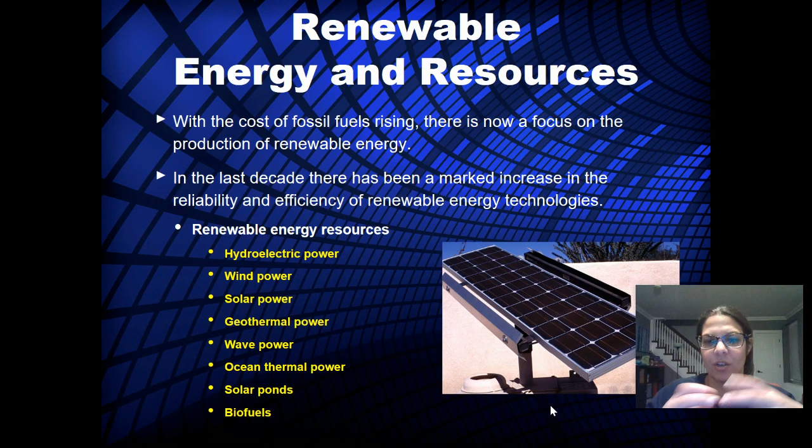Oh, and biofuels, how could I forget about them. Biofuels are anything that you burn, like wood is a biofuel. It's a renewable resource, depending on how you use it—think back to the Lorax. Also, cow poop can be used. Remnants of, it's called bagasse, the remnants of cane sugar. You take the sugar out of the sugar cane, and then you're left with this stuff, and you can burn it for energy.

So, advantages: there's little local or global environmental long-term effect, but like solar panels, we don't make them in the US because they're not very environmentally friendly to make. Once established, you have very little input needed to keep these systems running, which sometimes is why we don't want them, because they're only going to provide jobs to install them. And then the maintenance is very few and far between.

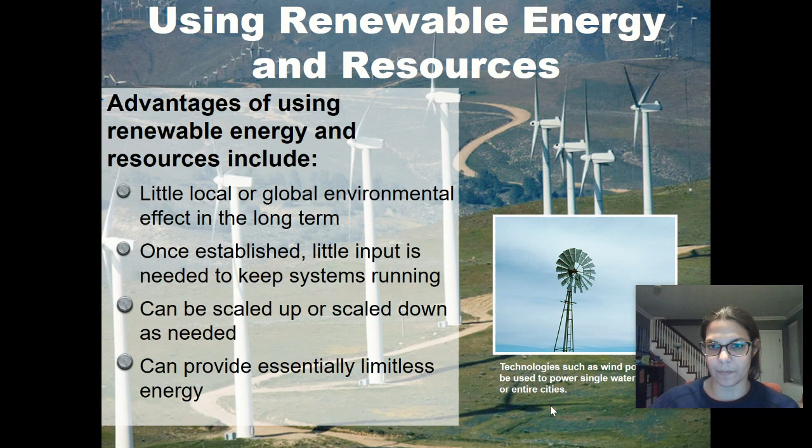They can be scaled up or scaled down as needed, and they can provide limitless energy. The sun isn't going to stop shining, the wind isn't going to stop blowing, the tides are going to keep going.

Disadvantages: there are high setup costs, just like with almost any type of energy. There's a lot of environmental damage in the short term, but usually it does bounce back. Like with solar panels, you have a field, and what happens is you change the habitat of the area. A lot of technologies are inefficient.

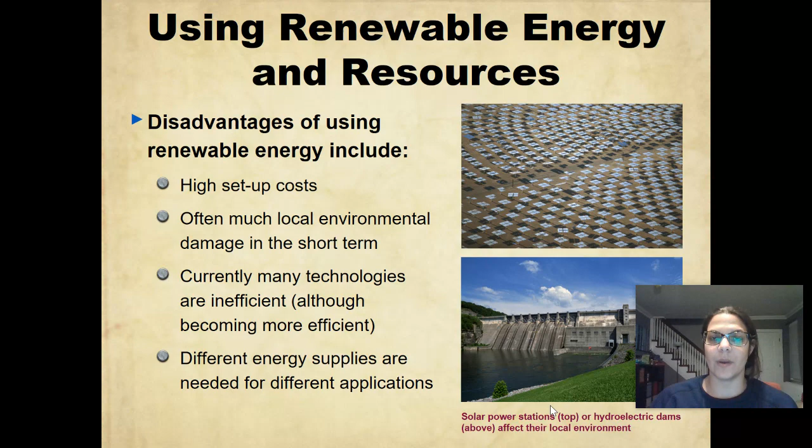They're becoming way more efficient—solar panels used to be only like 2% efficient, and now they're 24% efficient last time I checked, which is really amazing news. And different energy supplies are needed for different applications. You can't put solar energy in your car, but if you have an electric car, you can plug it into an outlet, and hopefully your solar panels will end up powering your electric car.

So we have wind power, wave and tidal power, solar panels, and hydroelectric power, which we've already gone over.

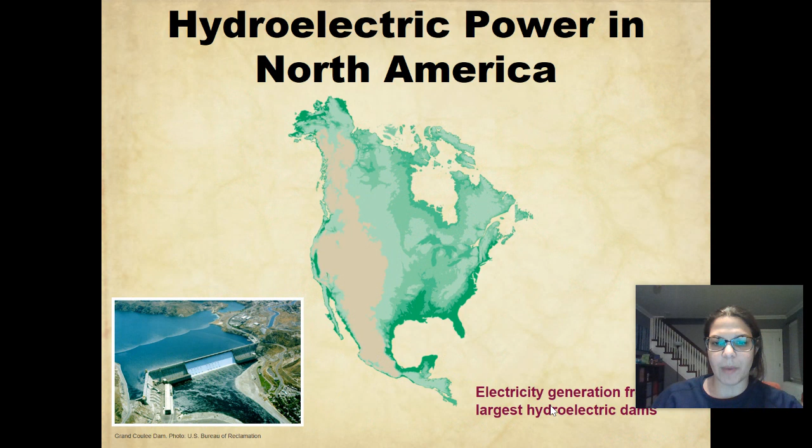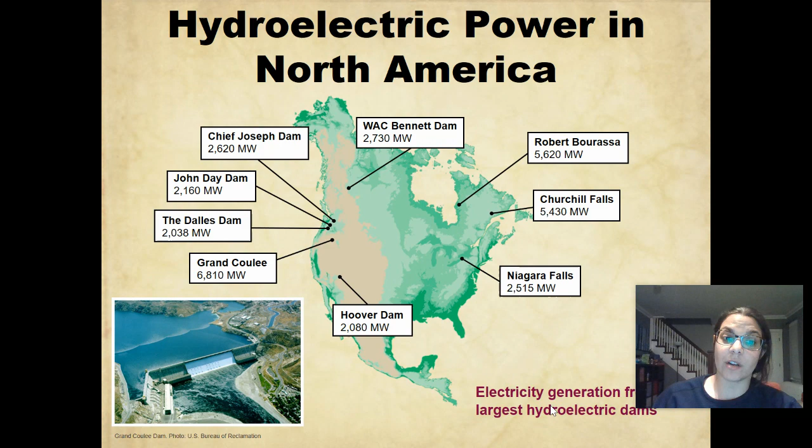With hydroelectric power, we do have a decent amount of dams, but as you know, we don't want to dam up all our rivers, and the U.S. Army Corps of Engineers is saying no more—we're not building any more big dams.

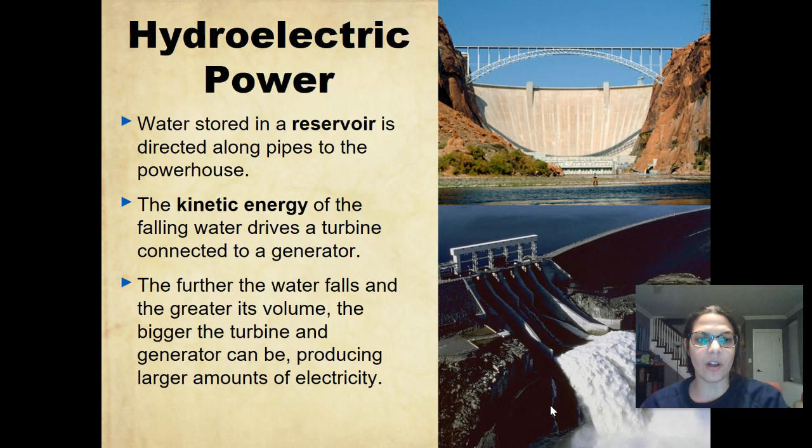Remember how hydroelectricity works: you have water in the reservoir behind the dam. With most types of energy, you want to turn a turbine. So coal, oil, natural gas, and nuclear heat up water to create steam, and the steam turns the turbine which turns the generator, generating electricity. With hydroelectric power, it's just the water that spins the turbine. The further the water falls and the greater its volume, the bigger the turbine and generator can be.

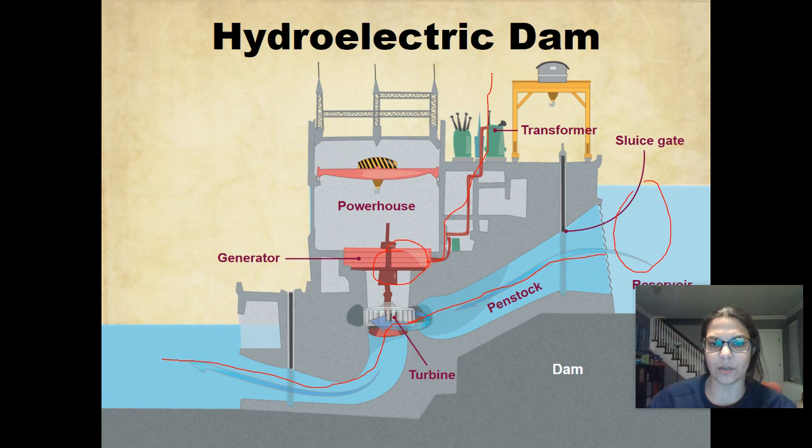With hydroelectric power, you have a high net energy. It is very efficient, has a long lifespan, and all those amazing benefits we learned about dams: flood control downstream, recreation upstream, and a solid source of irrigation water and drinking water.

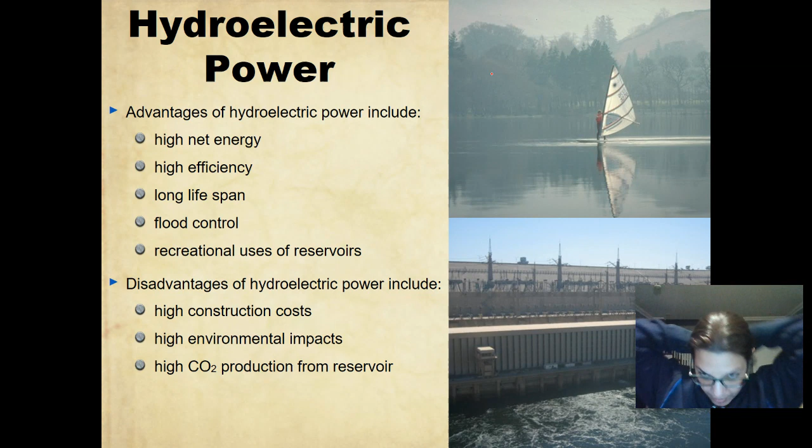But there are high construction costs—dams are really expensive and take a long time to build. You have environmental impacts, since fish can't swim upstream. There's also high carbon dioxide production from the reservoir, because you've taken productive land and flooded it, creating anaerobic conditions that produce a lot of carbon dioxide.

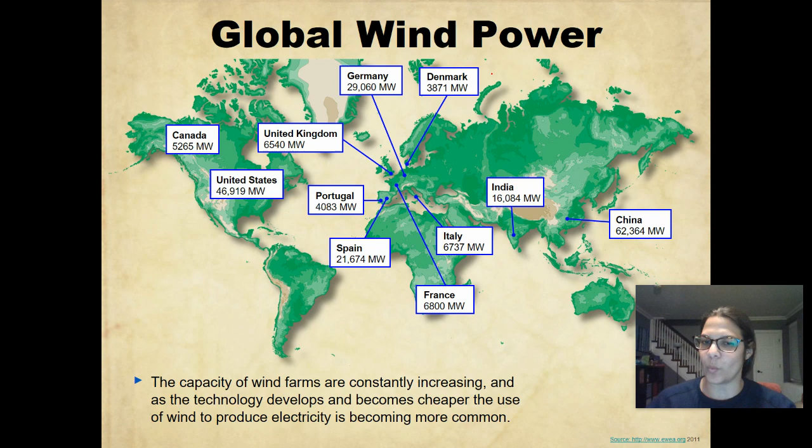In North America, wind speed is relatively constant in certain areas. You need the tops of ridges, coastal sites, and wide open plains, and the turbines need to be really, really big—these wind turbines are massive, like the size of a school bus plus.

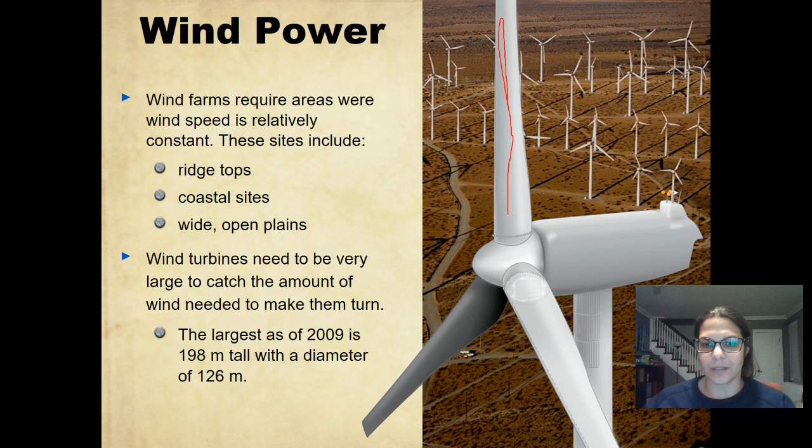These diagrams are also outdated. Inside a wind turbine, the wind catches the blades. If this is your wind turbine, what happens is they actually rotate to face the direction the wind is coming from so that they can spin.

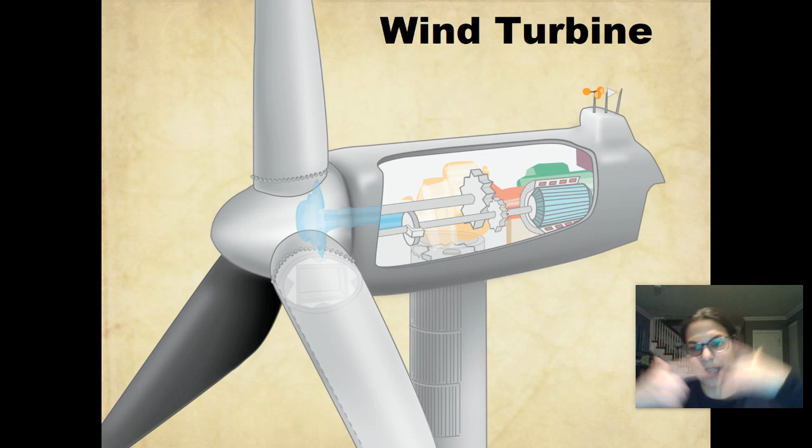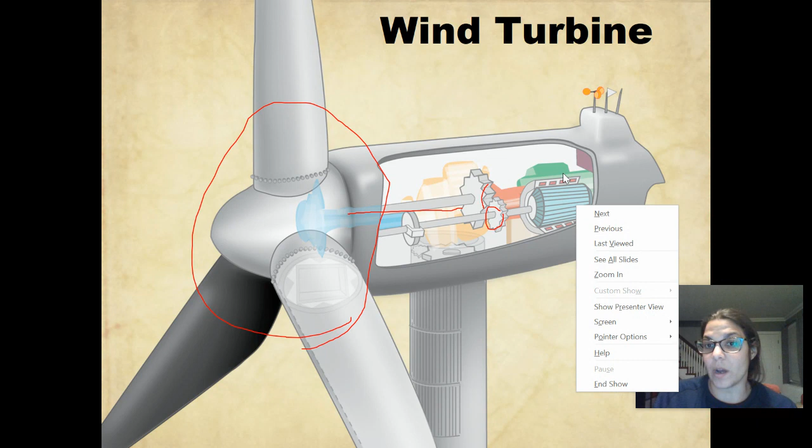So here, the wind turns the turbine, and this shaft spins. The shaft then spins a smaller cog, which is what turns the generator, getting it to the rotational speed needed to generate electricity.

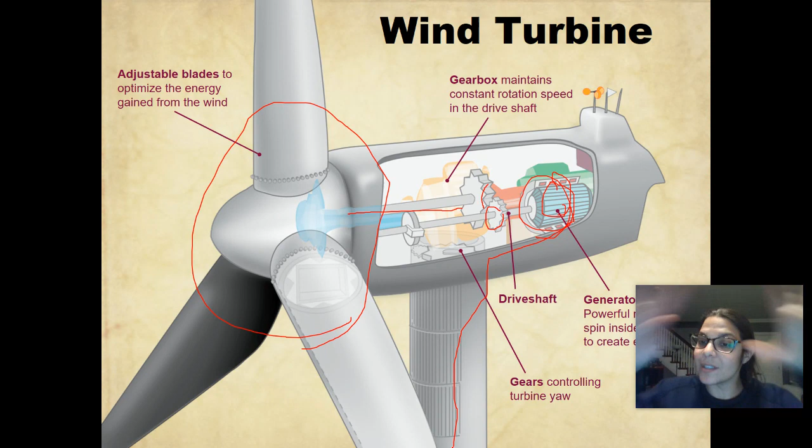Okay, so adjustable blades, the gearbox maintains the rotation speed so it doesn't go nuts, and that's the generator there. So literally every single wind turbine has a yaw, going back and forth. This generator here is generating electricity, so every single wind turbine is generating electricity. That electricity flows down through wires, down through the bottom of the wind turbine, and it goes into whatever grid system that's connected to. So every single wind turbine is its own little power plant. They're amazing.

So wind power has no emissions, little effect on land. It really doesn't disrupt them. It's a very small footprint. They can be located in a lot of areas like the sea, very compact, quick construction.

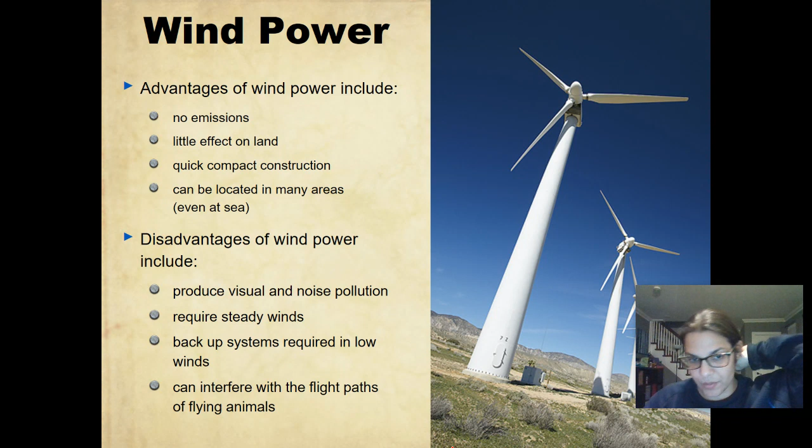However, they do produce visual and noise pollution. Trump had said last year that we can't do wind power because the noise pollution causes cancer, which is not true. But there is a certain whir to it. They do require steady winds, and you need backup systems because there isn't going to be wind there all the time. And it can interfere with the flight patterns of flying animals—migratory birds—this is an issue, especially when they're offshore.

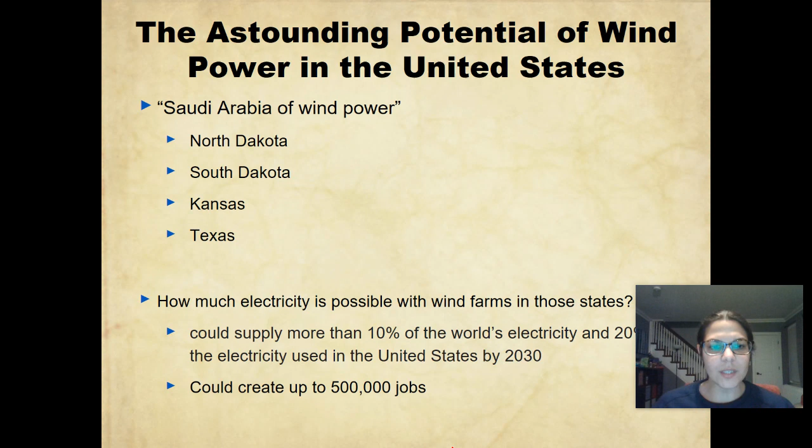But the Saudi Arabia of wind power is North Dakota, South Dakota, Kansas, and Texas. Texas has an insane amount of wind energy, which is weird because Texas is also the biggest place for oil, and it has a huge amount of solar. So there is so much possibility when it comes to wind power, and this is where we have really awesome potential.

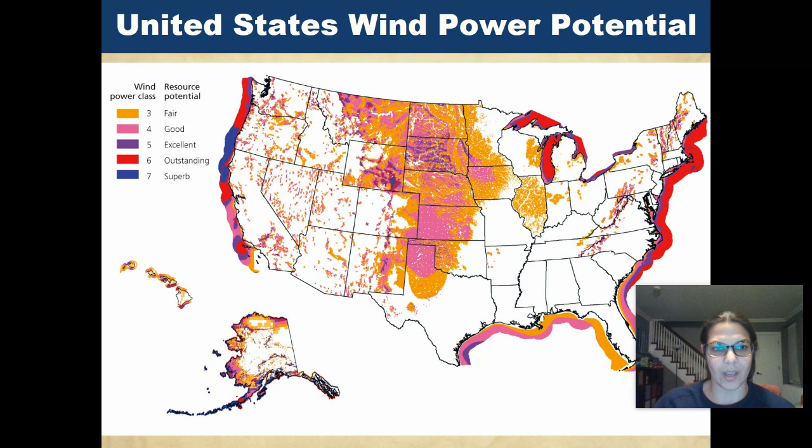So if you see New Jersey here, you have pink, purple, and then red. Pink is good, purple is excellent, and red is outstanding. So a lot of these areas that are offshore in the middle of the Great Lakes, you can go a couple miles out and have these wind farms and create an insane amount of electricity. Okay, look on the West Coast—this blue, superb.

Now we're gonna watch some videos.